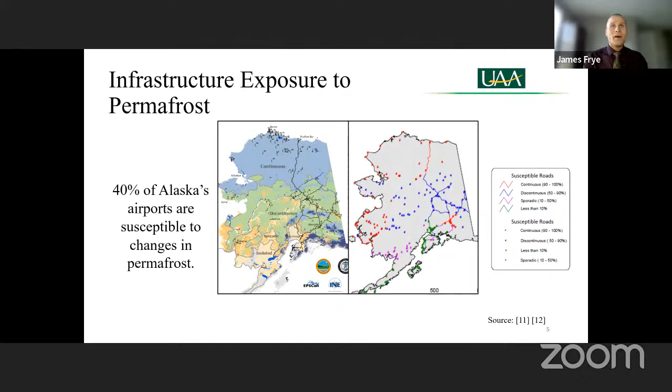I wanted airfields where we're comparing the same type of material from location to location. So all of these airfields have asphalt pavements, so we're comparing apples to apples as far as pavement health. I wanted locations with representative permafrost conditions. So if you refer back to that map of continuous, discontinuous, and sporadic zones, each of those locations would be representative of those different zones of permafrost.

Also looking at the quality of pavement evaluation history. The Alaska DOT is very good at upholding a 3-year rotational schedule for their pavement evaluations. So all of these locations had pretty much an inspection done every 3 years for the past several decades. So it was a very comprehensive, very good data set.

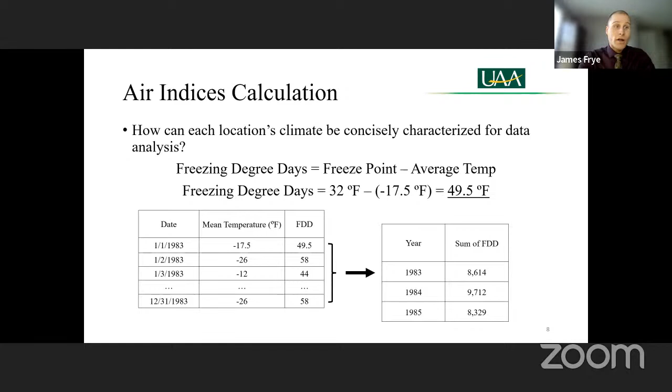So number of degrees below freeze point would indicate a freeze index. A number of degrees above freeze point, or above 32 degrees Fahrenheit, would indicate thaw index. You sum those values over a calendar year, and we were able to compare that over long time scales. And the result of that is found on this slide.

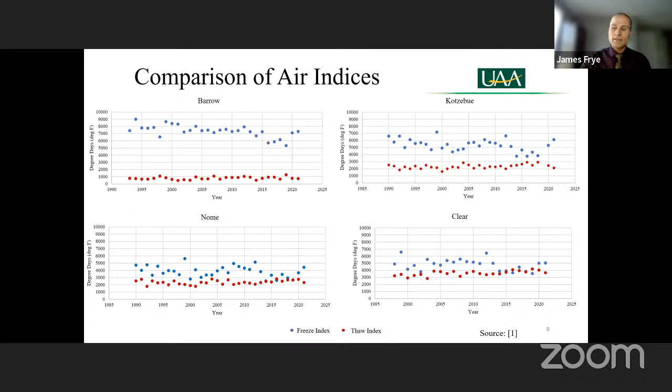So that's kind of wrapping up the first part of our climate assessment for these sites, and moving on, I want to dive into physical characterization. Some additional definitions I want to toss out there to you, specifically related to permafrost, would be ice-rich, thaw-unstable permafrost. So we're talking about frozen soil that contains a high enough ice content that it's going to become unstable when thawed. I really want you to think of smaller diameter soils, think of silts, think of clays.

These soils are going to retain a lot more moisture, and obviously when that moisture freezes, it's going to expand and create a larger volume. And similarly, when that soil column thaws, that moisture will melt and drain, and that volume is going to change a great deal. Conversely, ice-poor, thaw-stable permafrost is frozen soil that has tiny amounts of ice, and it's going to show a minor change in soil volume when thawed. So think of well-drained soils such as sand, such as gravels, things of that nature that aren't really going to have a major volume impact when they thaw out.

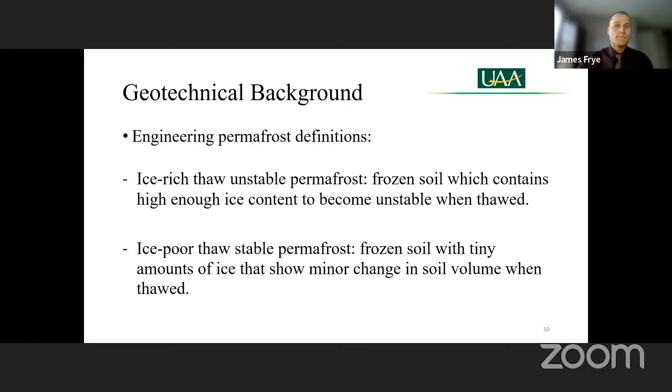There are variations in data that were encountered, and that's largely due to the spread of borehole locations with time. The DOT wasn't necessarily going in and conducting boreholes in the same exact location every single time they were doing an exploration. So for example, permafrost data at Nome was actually consolidated from an area of boreholes that are about 150 feet wide by 2,000 feet long. And if you're familiar with any types of geotechnical investigations, you know that there's going to be some variation there. That's largely what's leading to some of that variation in upper extent measurements.

If you pan over to Clear, you'll notice that that location that's located in interior Alaska didn't really show evidence of permafrost soils at all. So I do want to take a second here just to emphasize the importance of why we were looking so closely at these soil profiles.

So as previously mentioned, all of these airfields, they're surfaced with asphalt. And asphalt is much unlike concrete in the fact that it's not a structural member. It's not designed to carry the load of the aircraft or the vehicle or anything that's traveling on top of it. Rather, it's really designed just to transfer and distribute loads to subsurface layers.

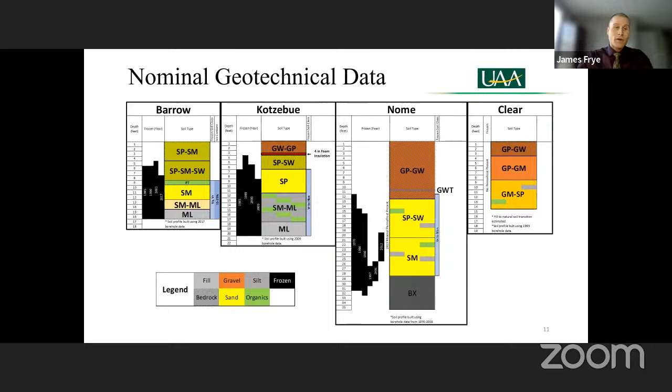Upper extent was pretty much the best parameter that we could pick. Most of these boreholes were drilled to about 20 to 30 feet in depth, and that really wasn't getting down below the actual permafrost layer. So there's still permafrost present at that. So upper extent was the best we could get as far as parameters.

Nome was the exception. Most of those boreholes were getting below the permafrost table, so we could get an upper extent, a lower extent, and actually calculate a thickness off of that as well. And in fact, the most recent geotechnical investigations from 2019 at Nome showed that permafrost had degraded entirely at most of the borehole locations on that airfield, with little to no frozen soil currently present.

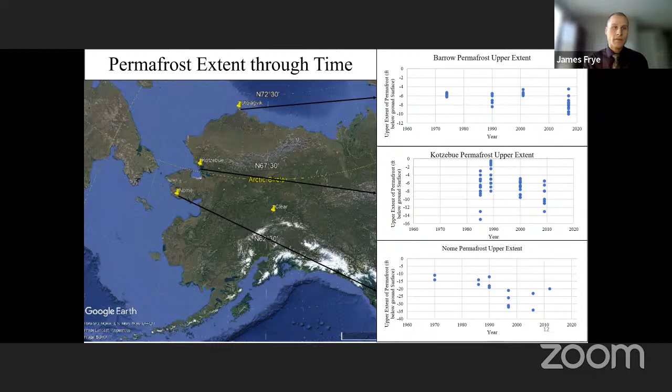So I want to compare that data with some other concurrent data that's been going on across the Northern Hemisphere. So if you're familiar with the Circumpolar Active Layer Monitoring Program, or the CALM program, they have a variety of stations located throughout the Northern United States and Canada. And several of them have a very close proximity to the selected airfields for this study. So the primary goal of CALM is to observe the response of active layer in near surface permafrost to climate change over long time spans.

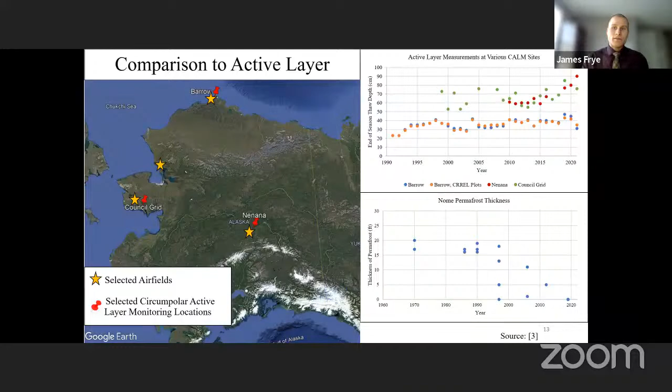So active layer here is defined as that portion of soil that sits above permafrost that thaws and freezes seasonally. So comparing that with upper extent data and thickness data, you can see here at Nome that Nome's permafrost thickness values are decreasing and converging to 0 by 2019. And then looking at the CALM data sites, you'll see that active layer is increasing as well. So both very indicative of degradation. So just kind of validation of both data sets.

So a main research goal here, obviously, was looking at pavement health. And I was wanting to pair these climate trends with pavement inspection data and really assess if there were any correlations there. So procedures for conducting pavement evaluations largely use a visual distress rating system that's called PCI, or Pavement Condition Index. And this is a numerical indicator, and it just rates surface condition.

So if you have a pavement with a score of 0 or a PCI of 0, that's denoting that that pavement is completely failed. You're not going to be able to use it. Whereas a PCI score of 100, that means that that's a brand new pavement. You just had it come out the paver and you just compacted it and you're good to go. So regularly monitored PCI ratings did exist through those evaluations the DOT had conducted.

And this helps entities and airfield owners really identify early on the need for major repairs, and you can kind of use that as a forecasting tool for when you're going to need to have some sort of construction project to go in there and fix that. So I selected this as a key metric for this research just because it was standardized, it was available, and it's pretty standardized across the nation.

In fact, back in the 1970s, the Army Corps of Engineers developed a pavement management system called PAVER, and that's adopted by most government agencies throughout the United States. The Alaska DOT uses this as a primary tool for conducting pavement evaluations and pavement management for their airfields. And I was given access to that pavement management system, which was very beneficial.

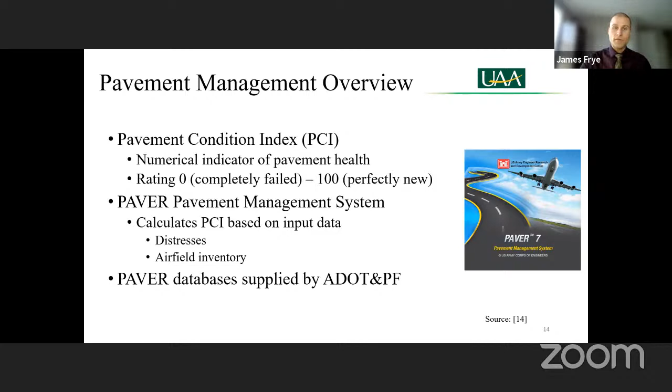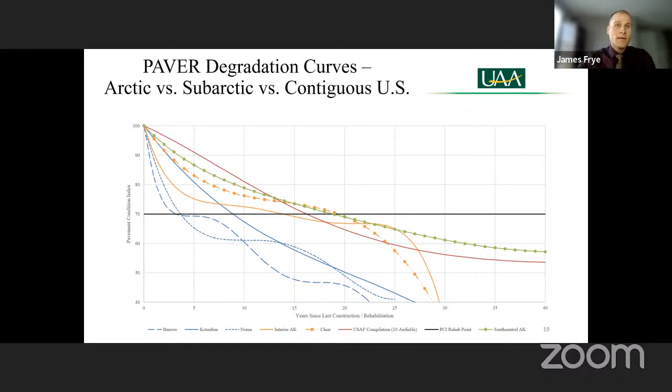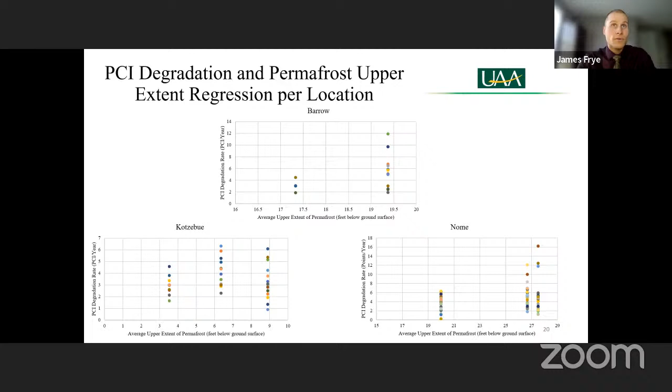So like I said, it's important to note that there's going to be other factors that affect pavement degradation rate, age of pavement being one of them. But this regression model did produce an R-squared value of 0.4872 when we're comparing that degradation rate to upper extent of permafrost.

Further investigation showed that a lot of these extremely high values up here on the top end of the plots, those were associated with pavement sections that historically had recurring problems with differential settlement that were confirmed to be attributed to permafrost degradation. So that's likely what's driving up a lot of these averages over here on the right-hand side.

Now, PCI isn't going to tell the whole story here. So PCI is derived from distress data, and distresses are just external indicators of pavement deterioration. So when an inspector goes out, they're looking at different types of distresses and aggregating those into Paver, and that's what's going to calculate your PCI.

So these pavement deteriorations or distresses are caused by loading, they're caused by environmental factors, and they're caused by construction deficiencies, and it may be a combination of any of the three. So what I did here was I developed parametric unit costs based off of the best practice for repairing each of these distresses, and was able to determine a lifetime treatment cost based off of how many distresses were located in each airfield.

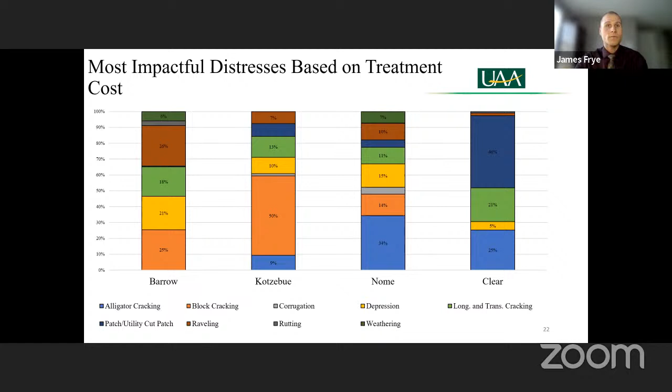And from past research, we're able to associate several of these distresses as being permafrost associated or cold regions related. So depressions and longitudinal and transverse cracking, we classified as permafrost associated.

Block cracking and raveling, which I'll show you some examples of here in a second, we considered to be cold regions related, and then everything else just lumped into the other category. For this research, we're not saying that every single recorded distress is in fact caused by permafrost degradation or extreme cold, but we're assuming it for this study just based on past research.

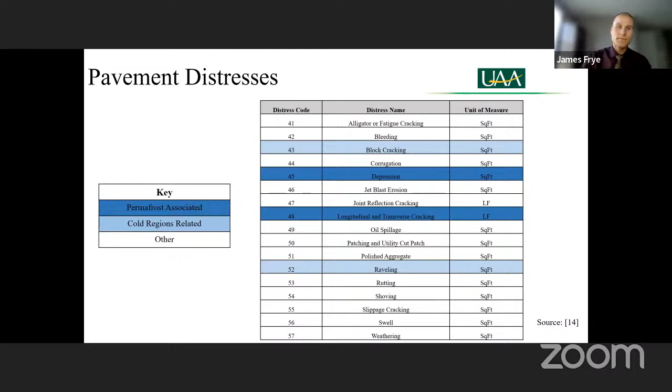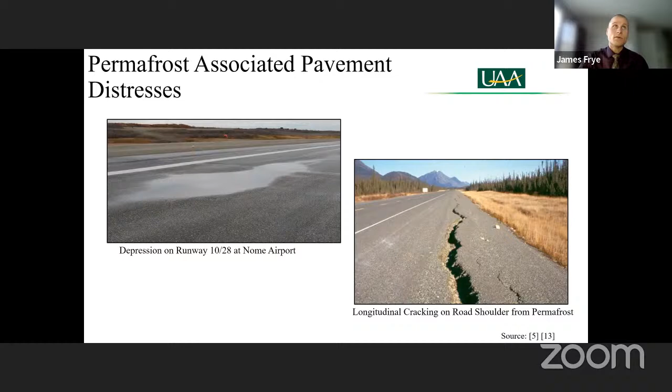And then over here on the right, you'll see some longitudinal cracking that's on a road shoulder that is from permafrost. It oftentimes does occur on the shoulders, but it can extend into the actual pavement section itself. And in fact, in talking with a bunch of the engineers at the Alaska DOT, these longitudinal cracks are not just going through the pavement surface, they're going deep into the embankment as well. So these are ones that we're considering permafrost associated.

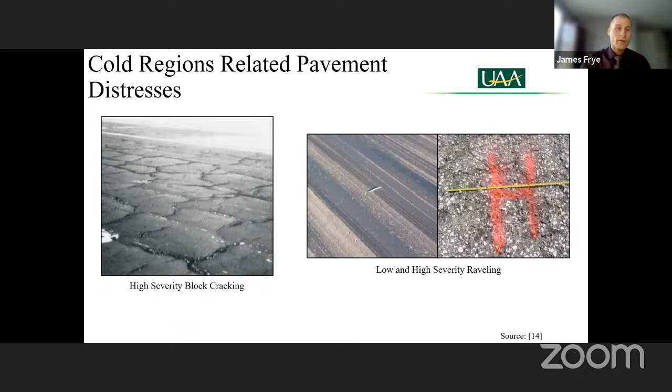On the right, you'll see raveling, and raveling, especially in these locations, is largely going to be attributed to damage from snowplows scraping the surface of these airfields time and time again, and you kind of see some different severities there.

So with these defined, we applied that to the previous cost model that I showed you and developed this plot. After applying that to this model, you'll notice that the majority of distresses were climate driven at Barrow, Kotzebue, and Nome. On the other hand, when you're looking at Clear, just over a quarter of the distresses were cold region related. Recall that the quality of embankment material and the lack of permafrost at Clear were probably contributing to this. But from this analysis, it's evident that the presence of permafrost and extreme cold climate are impacting what types of distresses we saw, and they are driving costlier maintenance and repair.

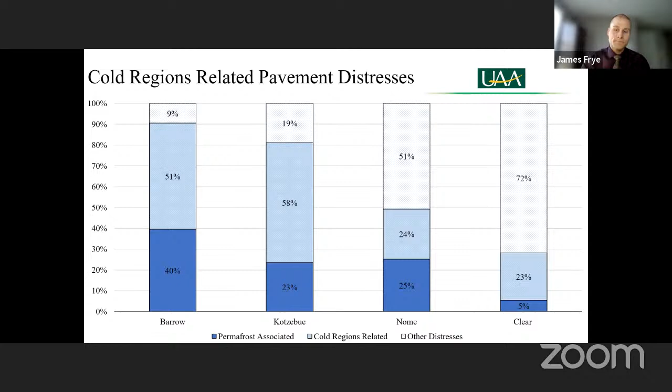For this particular model, 91% at Barrow, 81% at Kotzebue, and 49% at Nome represent the percentages of lifetime treatment costs that were permafrost associated or cold region related. And these locations also correspond to the highest PCI degradation rates that we previously investigated. At Clear, only about 28% of the distresses were considered in those categories. That was the first cost model in this study.

I'm going to walk you through another one. While I used parametric costs from published cost manuals for that last one, primarily RSMeans, to develop those cost estimates, this final analysis was really using historical data from the Federal Aviation Administration. The FAA has something called the Airport Improvement Program, and it provides federal grants for major rehabilitation and reconstruction projects at public airports. The state of Alaska largely leverages this and takes a lot of federal help to get a lot of these major rehab projects done and funded.

All these project costs and all this data were adjusted to reflect 2021 US dollars, just factoring in inflation there. And this is only a single data point in terms of actual recorded costs. This does not include preventative maintenance. This doesn't include state-funded projects, but as I said, the state largely leverages this for a lot of their major projects. So this is a valuable data point to consider.

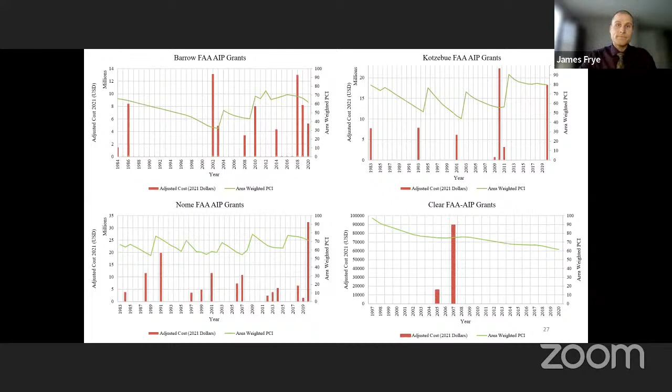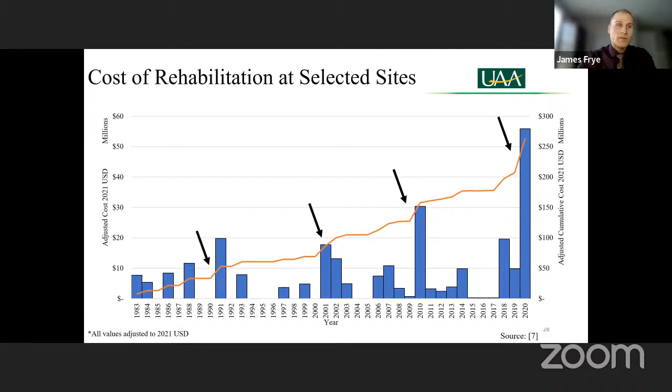But specifically, why did these rates increase over these time periods? It's going to take a bit more of a thorough investigation of the AIP grant program, and I'll just take a minute or two to explain some further analysis, just trying to explain why those funding spikes may have occurred.

So using enplanement data, I chose 3 additional airports in the lower 48, just to compare to our Arctic airfields. I filtered all of the airports in the U.S. by service level and type of hub and material and all of that, and selected an additional 3 airports at Yakima, Washington, Fort Smith, Arkansas, and Cody, Wyoming, just for comparison.

It might be caused by dynamic permafrost conditions. It might be other economic factors. We talk about the remoteness of our study locations, the increased travel requirements, the shorter construction seasons, limited availability of qualified contractors to go up and do the work. We have a lot of challenges related to executing these projects in Alaska. So those are obviously playing in here.

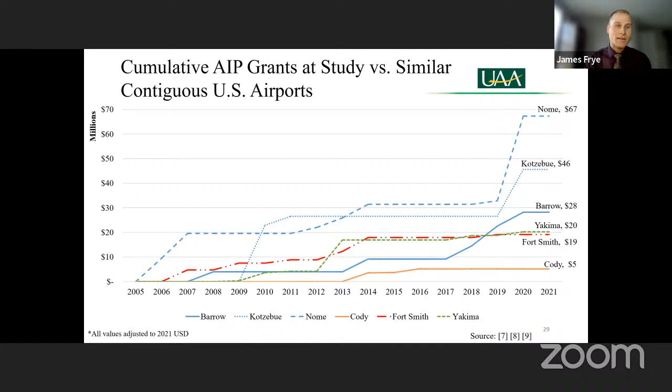So I was just looking at some DoD publications, and if you look at Anchorage, Alaska, compared to the U.S. baseline, the area cost factor in 2021 was 1.9. So we're saying on average it costs 1.9 times more to do a project in Anchorage than it does for the U.S. baseline. So once again, some contributions towards some of the data that you see up here on this slide.

So these maximums represent the highest number of thawing degree days in a calendar year that have been experienced in recent history. So years with greater thawing degree days can accelerate permafrost degradation. You're deepening in that soil profile. You're thawing more things out.

But this correlation here can prove useful to airfield owners when we're monitoring climate conditions and potentially forecasting future budgetary requirements and future programming requirements for some of these airfields.

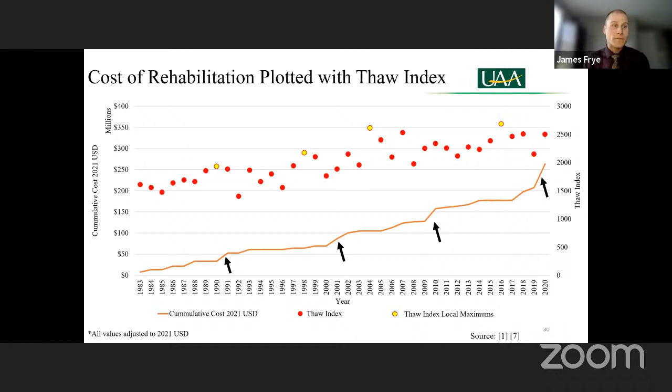So just to bring it home with the research here, I just want to summarize some of the research conclusions. So we're able to find that calculated air indices at all these study locations do indicate warming trends over the past 20 to 30 years. The freeze index was shown to be decreasing with time at all of our study sites.

The thaw index was shown to be clearly increasing at Kotzebue, Nome, and Clear. Concurrently, permafrost's upper extent decreased with time at Barrow, Kotzebue, and Nome. Permafrost at the Nome airport had degraded almost entirely at all borehole locations by 2019. And this was shown through the aggregation of borehole log data that showed the extent of frozen soil.

We used family curve tools out of PAVER, and that enabled the generation of some degradation curves to show side-by-side comparison of airfields. And that showed that study airfield pavements were shown to degrade 2 to 3 times faster in continuous permafrost zones compared to discontinuous regions and locations in the lower 48.

Curves from Barrow and Kotzebue degraded to a critical PCI 3 to 4 years post-construction, respectively. Nome reached critical PCI after 9 years. Clear reached it after 20. So for reference, the consolidated data from 10 airfields in the lower 48, as a U.S. baseline average, took about 16 years to degrade to critical PCI, just for comparison's sake.